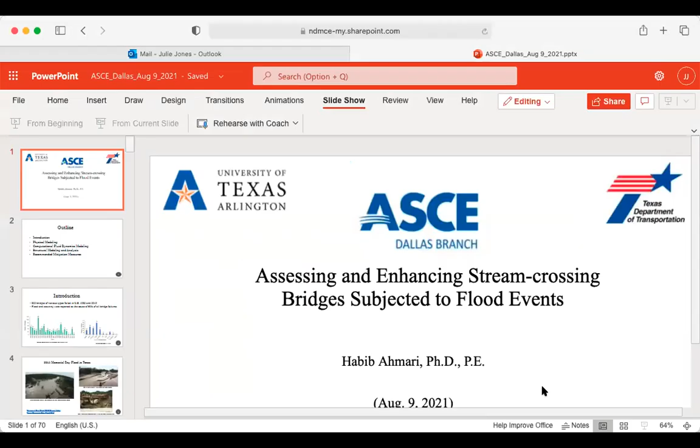It's not moving. Apparently it's... there we go. No, it should work. Okay, thanks so much.

So today I'm going to talk about some background information about this project. I'm going to talk about the physical modeling that we have performed, the numerical modeling as well as structural analysis, and finally the recommended mitigation measures that we have come up with for making bridges safer against flow hydrodynamics.

As you can see in this picture, between 1989 and 2012, more than 800 bridges failed in the US for different reasons. But if you look at the stats on the right side of the picture, you can see the major cause of collapse in bridges is attributed to either flooding or scouring, which is all a hydrodynamic issue. So more than 60% of bridge failures that happened in the US happened just because of flooding.

This is one example we had back in 2015 in the US during the Memorial Day flood event. There was about 12 inches of rain that poured down very quickly. The river water level rose about 35 feet, and several bridges failed in Texas, Wimberley and Fisher Road. You can see how the collapse happened and how this situation caused significant damage to the economy and accessibility to the region.

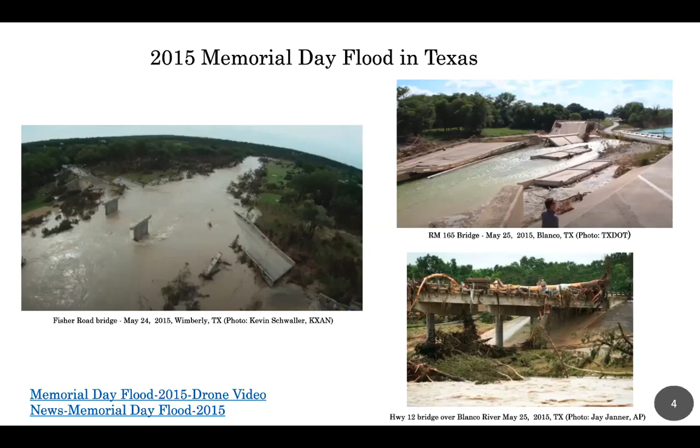If you focus on Texas only, TxDOT or Texas in general has the largest inventory of bridges, more than 54,000 bridges. In the US, we have about 10% of that basically in Texas.

In Texas, the way we design bridges is for 100-year floods, considering about 4 inches of freeboard. But we have seen many bridges that, even during the 25-year or 50-year flood, are inundated, either collapsed or partially damaged.

The TxDOT design policy requires designing bridges for a 100-year flood, while also considering mitigations for hydrodynamic forces, including shear keys or ear walls. An example of shear keys can be seen on the right side of the picture in the bottom slide.

These are the measures currently in place, but as I mentioned, we have seen many bridges collapsing even under lower flood conditions, like 25 or 50 years. The reason has been either significant velocity in the stream or significant debris brought by the flow.

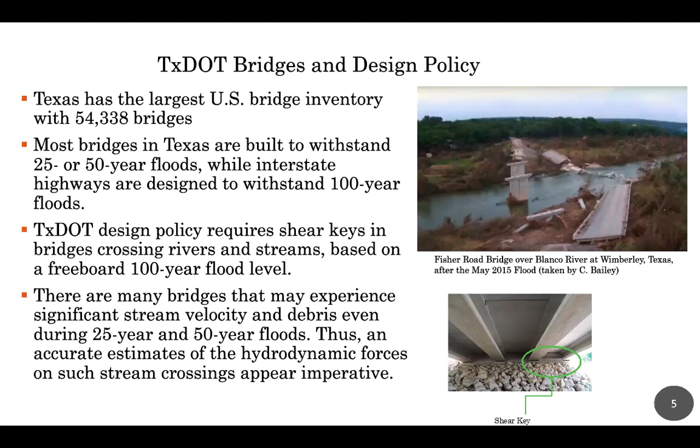Our approach in this study was conducting scale modeling in the lab of 4 different bridges in Texas, looking at TX girders, box beams, and slab beams. We also did computational fluid dynamics for scenarios we could not handle in the lab due to limitations of physical modeling. Eventually, we developed finite element structural models of the bridges and compared the forces to the resistance or shear forces in place based on current practice. Where those forces were larger than existing resistance, we came up with recommended mitigation measures for those cases.

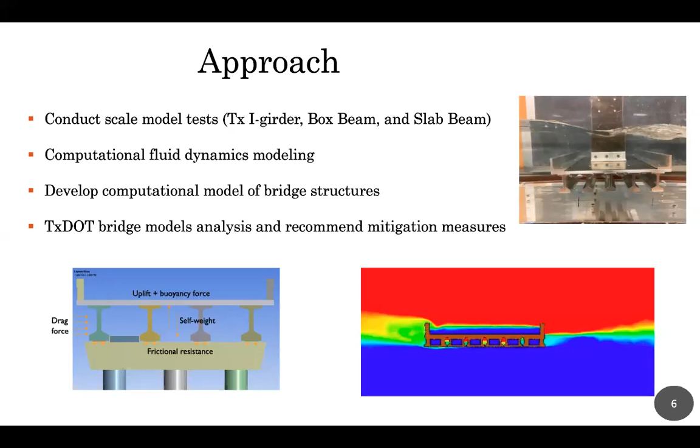In terms of physical modeling, we had 4 different tasks: starting with designing a scale model, then measuring flow and forces during different scenarios using several instruments. We conducted scale model tests on 4 different bridge models, and eventually developed force and moment coefficient design charts.

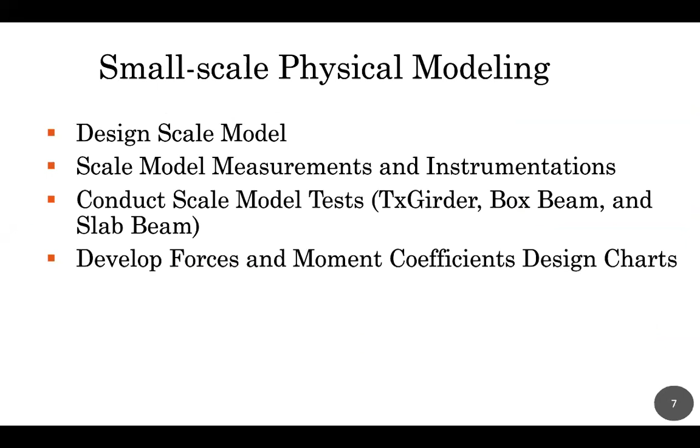This is our experimental setup. The flume was 17 feet long, 1 foot wide, and 1.5 feet tall. We built our scale model out of aluminum, which has almost the same density as reinforced concrete.

We scaled the bridges down 50 times smaller. We built girders, decks, as well as railings, and substructures, which I'll show you later on.

We measured flow velocity, discharge, depth, and so on, plus forces and overturning moments with instruments attached to the bridge. Here you see the bridge, the load cell, and the torque cell. We connected them and measured everything during different flow scenarios.

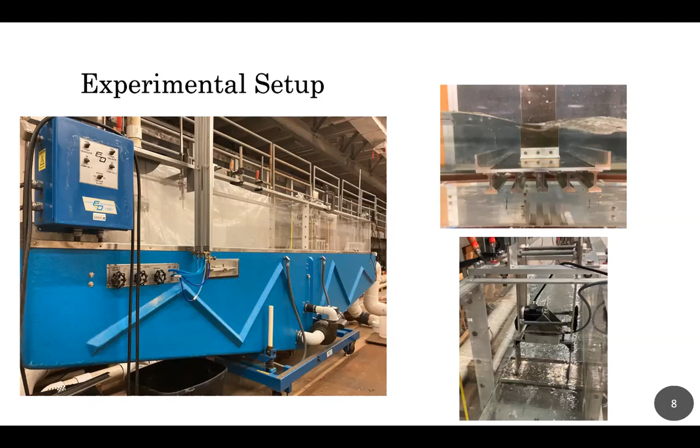These are the bridges that we modeled. We looked at 2 different bridges in terms of road base: 24 feet and 44 feet road base, and 4 different beams or girders.

Bridge number 1 is TX28. The second one is TX54. Then we have a box beam, 5B28, and a slab. So these are the superstructure scenarios that we looked at.

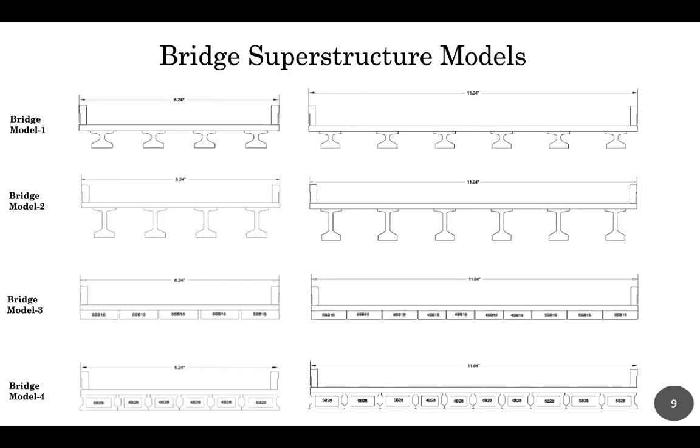We also included the more common type of railing in the model.

This is an example of how we scaled down the bridge size, using TX28. The deck thickness is around 9 inches in reality, and in the lab we scaled it down to 0.19 inch. The girder height for TX28 is 28 inches tall, so we scaled it down to almost half an inch. These are the scaled-down dimensions versus the actual dimensions.

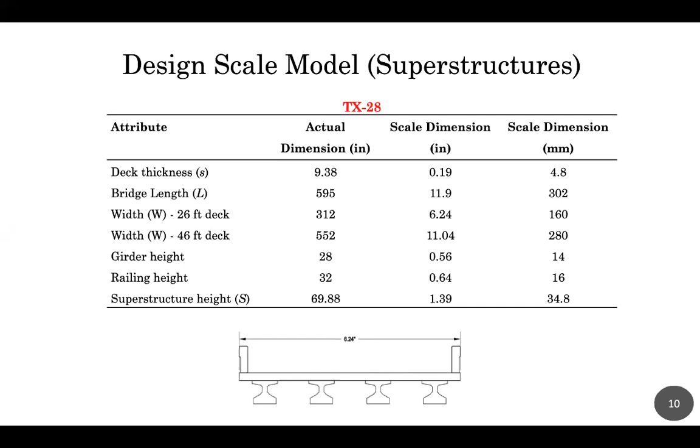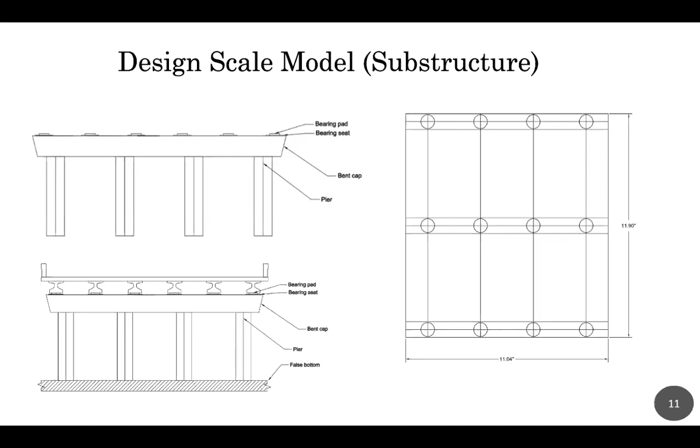This is one scenario we looked at, simulated using a flat plate debris. There are other cases where debris just accumulates in the flow direction across the channel, forming a wedge type of debris. We simulated both of these using wood material in the lab.

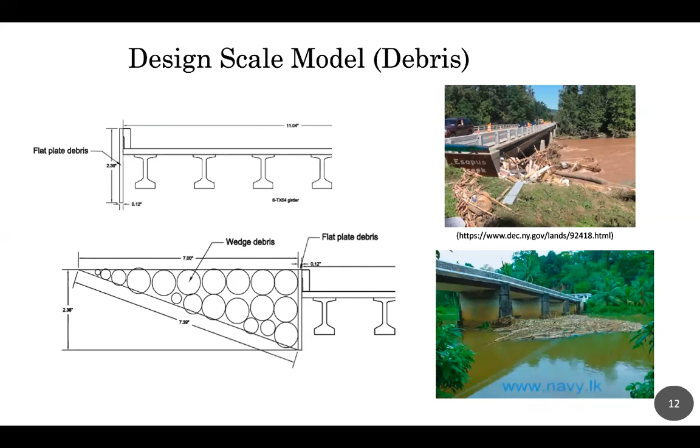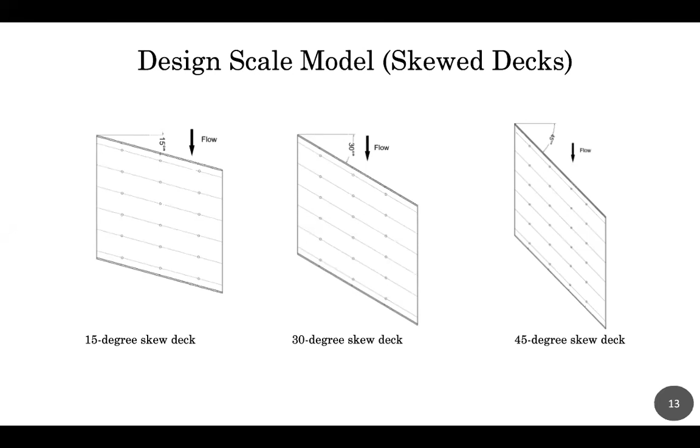Also, we look at the effect of the skew of the deck on the hydrodynamic forces. Not all bridges are straight, so the flow is not always perpendicular to the bridge. We look at how the skewness would affect the forces and the stability of the bridge. Besides the 0 degree skewness, we look at 15, 30, and 45 degree skewed cases, based on what we have seen in the field.

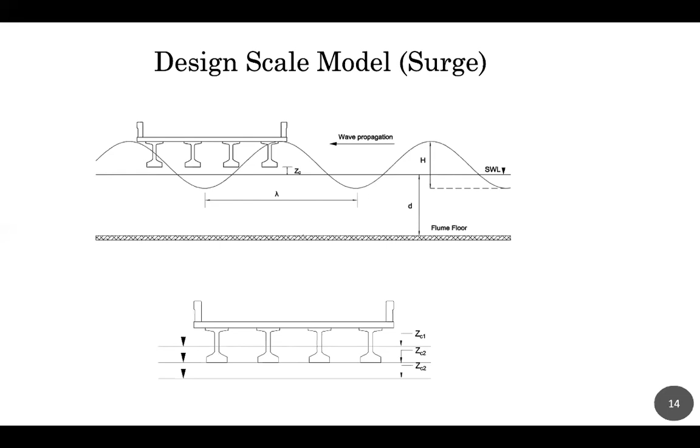The other thing we have seen in coastal areas is surge. Surge and wave are major components of the flow that can cause bridge collapse. So we look at surge with different surge height, length, as well as different initial still water conditions and flow depth.

For the flooding test conditions, we collected more than 300 bridge data points across Texas, either in inland areas or coastal zones, to come up with the flow range we need to look at. That range includes the depth of flow, the velocity, and how close the bridge deck is to the stream bed. We incorporate all these numbers together to come up with dimensionless numbers.

The first one is the inundation ratio, which measures how much the bridge is inundated. If the flow is just below the girder, the bridge is not inundated. If the flow is at the top of the railing, the inundation ratio is 1. As it goes up and up, the bridge gets more and more flooded. We look at inundation ratios basically from 0.25 up to 3, to incorporate the depth of flow.

The proximity ratio explains how close the bridge is to the bottom of the stream. If the bridge is too close to the bottom, there's a large increase in velocity and a lot of scouring might happen, which changes the flow regime entirely. We look at cases where the proximity ratio was around 1 to 5, covering very deep channels or very shallow channels.

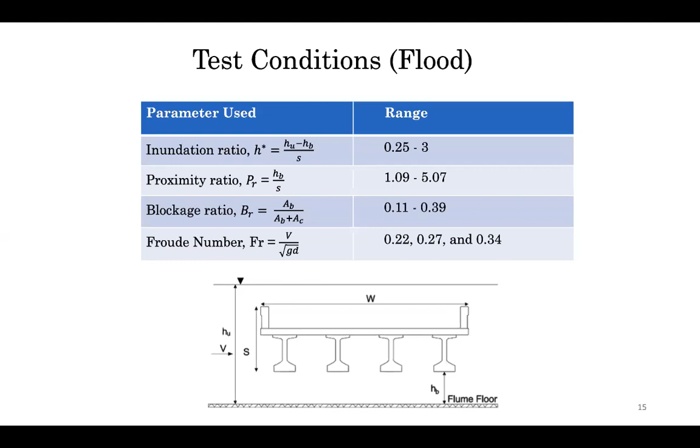And then we have a blockage ratio, for cases where you have a substructure and debris. This measures how much of the entire flow is blocked by debris or by the substructure, which would cause changes in hydrodynamic forces.

This is basically the test condition for surge, as I mentioned, one of the components. We look at different water depths. The model is 8.5 inches, but in reality it's 425 inches, about 35 feet, with flow depth up to 40 feet in the prototype. We look at the wave period, the wave height, and also the clearance height, with different water depth before the surge starts.

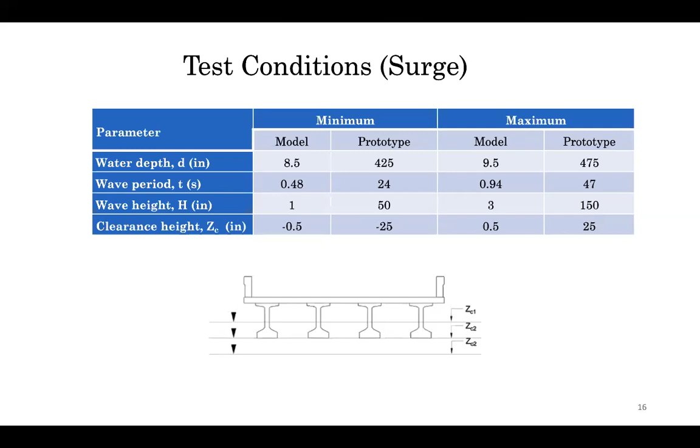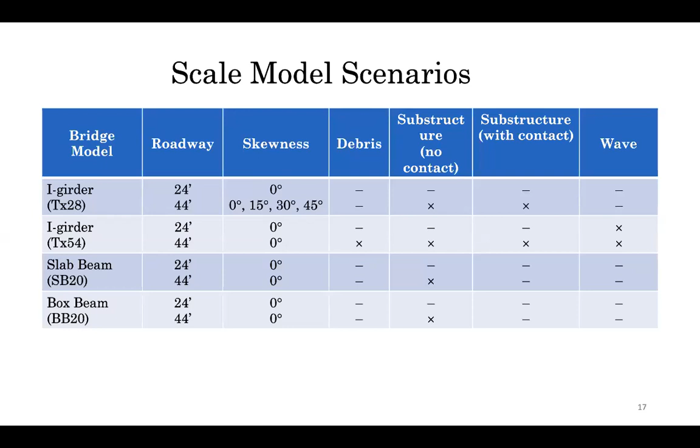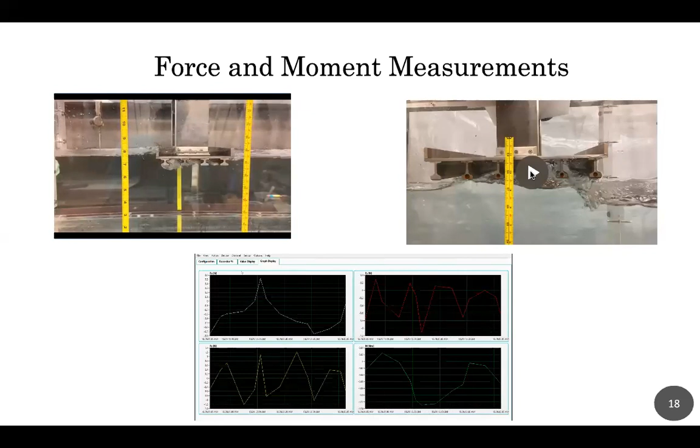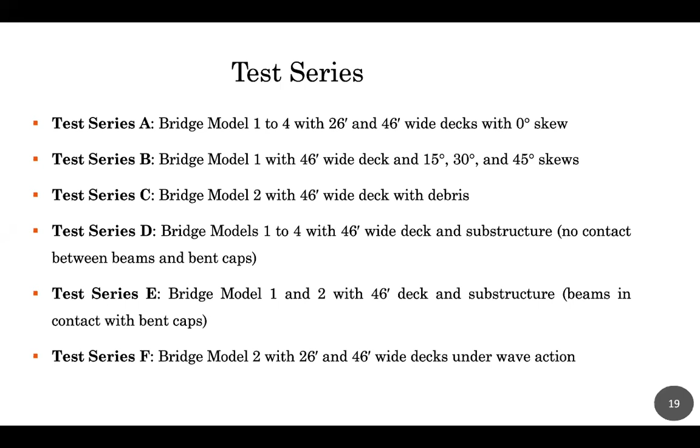So these are the test series A to F with different combinations of bridge geometry and different flow conditions, skewness. If you have a bridge with substructure and superstructure, we put the deck on top of the substructure without any contact to measure the forces. Then we put the deck on top of the substructure and remove the gauges to see if the bridge will collapse under hydrodynamic forces. Eventually we look at bridges under wave action. These are different scenarios we examined, a combination of flow conditions, geometry, as well as flow versus wave.

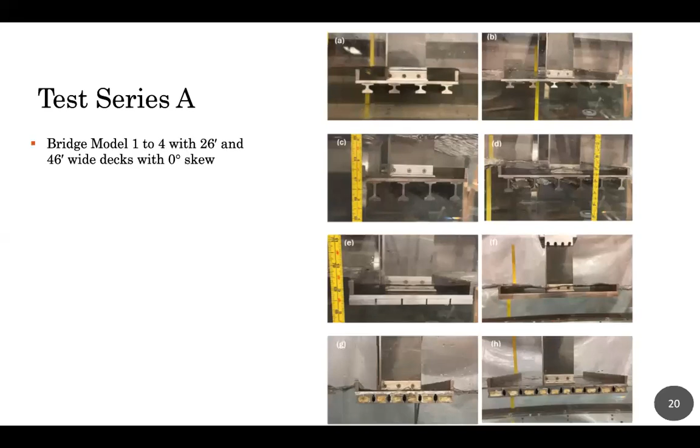So this is an example of test A. You can see on the left side a 24 foot roadway, and on the right side a 44 foot roadway, under different geometries: TX28, TX54, box beam, and slab beam.

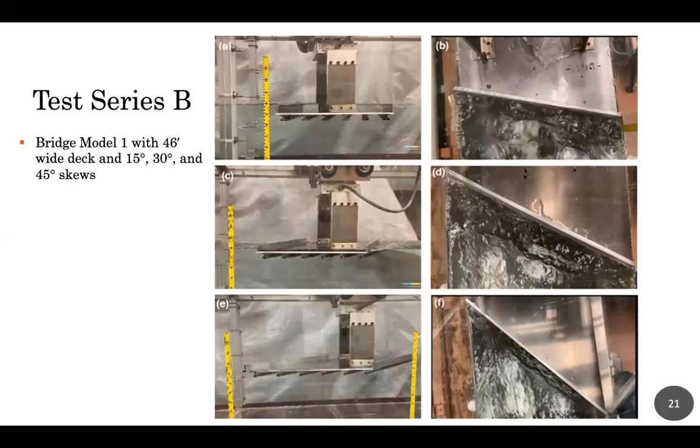I'll just quickly go over this slide. Here we have a straight deck versus a skewed deck from the top: 15 degree, 30 degree, and 45 degree skewed deck.

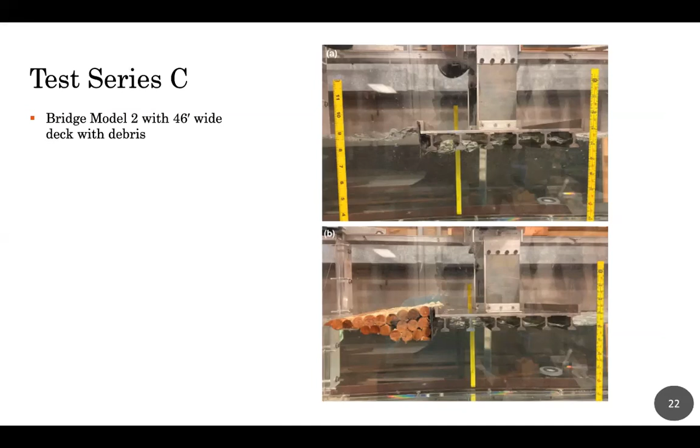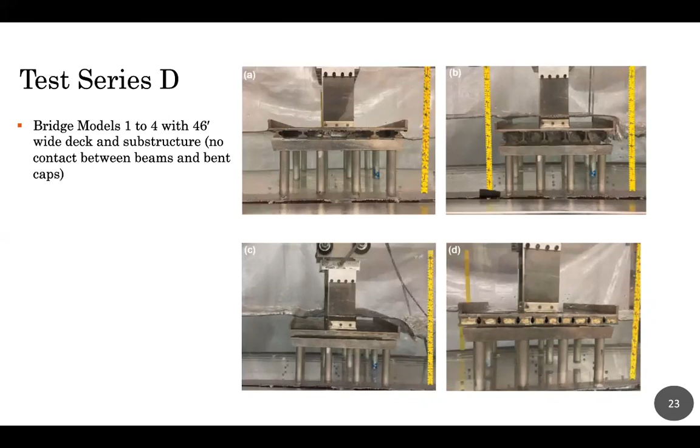This is the scenario where we look at the substructure and superstructure together, but we connected the system to gauges so we can measure the forces. There was no connection between the substructure and superstructure, making sure the bridge can move without any friction.

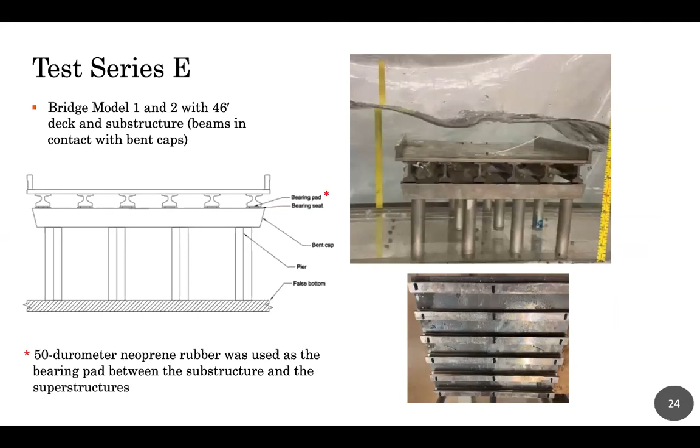Here we look at the wave. As you can see, different types of waves in terms of height, flow depth, duration, and wave length were simulated here.

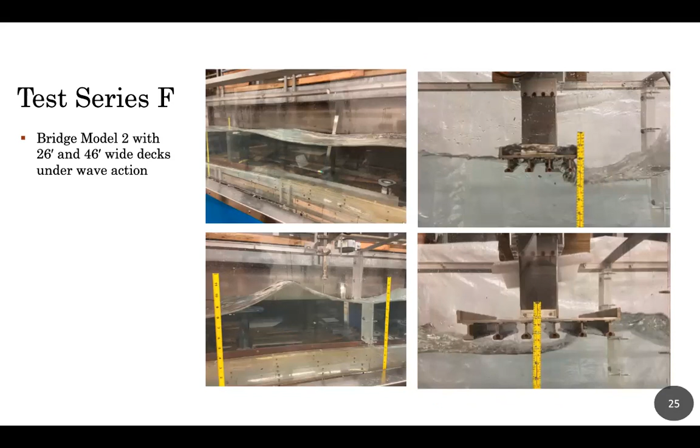So once we have all the measurements in terms of the forces, we look at the primary forces applied on a bridge. This is just the superstructure. Forces include hydrostatic force on both sides of the bridge, buoyancy pushing the bridge up, and the drag force.

These two are the dynamic forces; the first are the static forces. The drag force pushes the bridge in the flow direction, and we have lift force, either pushing it up or pulling it down, depending on the flow condition. We also have overturning moments.

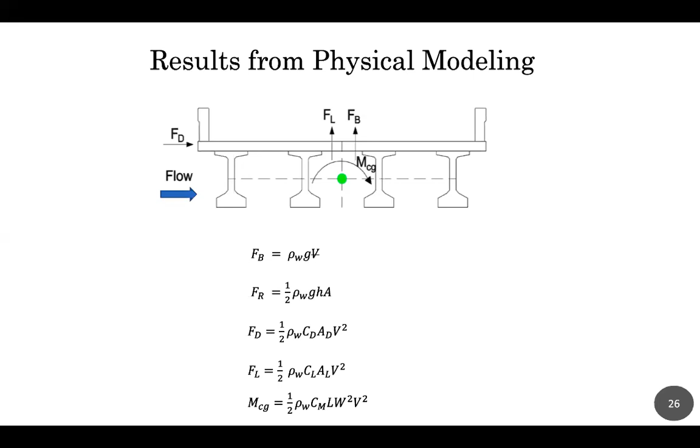So we have the forces and moments measured by the instruments, but the question is what are these numbers, the coefficients we have: CD, CL, CM. This is basically how the shape of the bridge will impact the amount of force. This is not something we can just come up with; you have to have the exact shape and test it, and depending on the shape of the bluff body, these values may change. There are other factors affecting how CD, CL, and CM will change. I'm going to discuss how we come up with these values.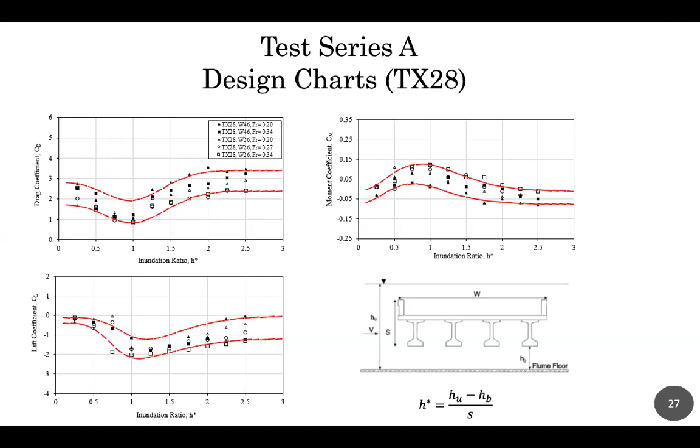Same thing, you can see the moment coefficient has a small variation with the inundation ratio, but again peaks at an inundation ratio of 1. So we ran many scenarios. I don't want to show all of them here, but this is just a summary of all bridges without substructure, just superstructures, but different geometry.

So this is the trend we have seen for many cases across different geometries under different flow conditions. You can see there is a higher bound and lower bound of the lift, drag, or moment coefficient that can be used for the design of a bridge, depending on what type of flow condition or bridge type we are dealing with.

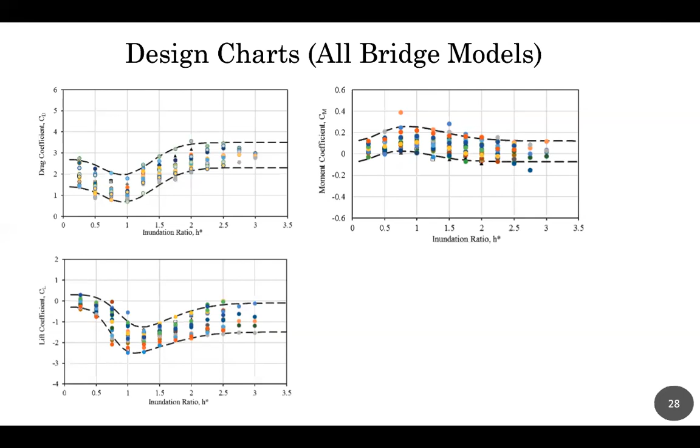So based on the figures and relationships we prepared, these are the design equations for CD, CL, and CM. Either we can use a general equation for any type of bridge under any flow conditions, or we can just use equations developed based on a specific bridge geometry.

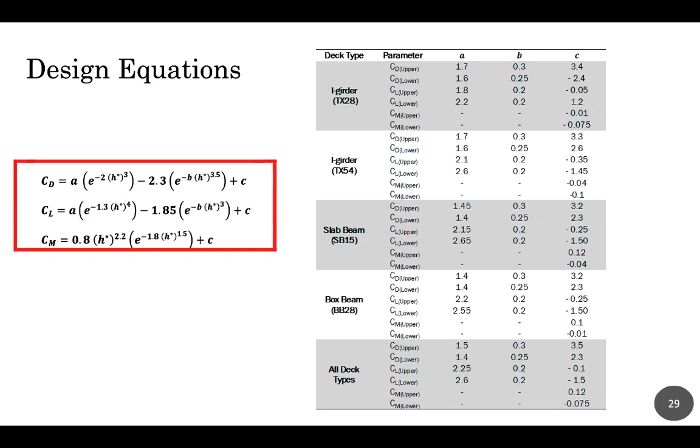So we developed this equation, and then we looked at the effect of skewness, from 15, 30, 45 degree skew, as well as zero skew. The zero skew is basically the blue and green color dots. If you change the skew, obviously the lift, drag, and moment coefficients will change. But this information can be used when you're designing a skewed deck.

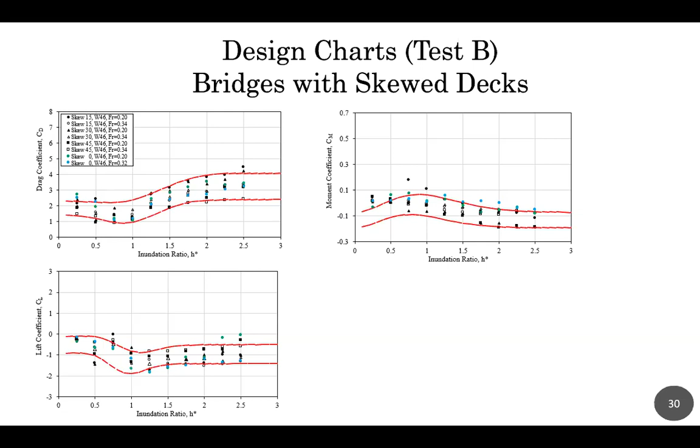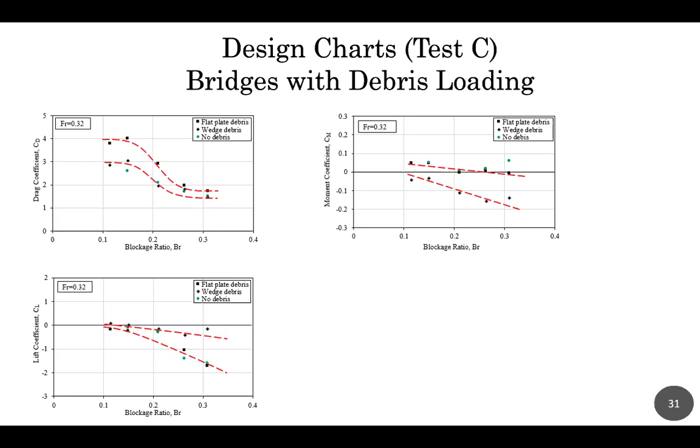This is also looking at the bridge debris, how blockage ratio would impact the change in drag coefficient, lift coefficient, and moment coefficient. So we have flat plate, the slab, which would create higher values of CD and CM, and then wedge debris which streamlines the flow and doesn't cause that much drag compared to the slab debris. So we developed these charts also in case you are designing a bridge with debris.

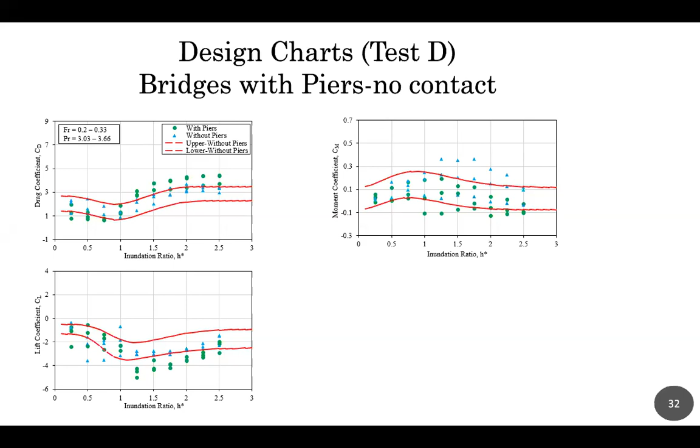This is looking at basically the effect of the superstructure and substructure together. So these are the upper and lower boundary when we did not have any piers, but when you add the piers, obviously the blockage increases and would change the forces acting on the bridge itself. So if you're designing a bridge that has abutments and piers, definitely the drag force would be much different from just a bridge across the road without any middle piers.

So for this case, we tried to see if the bridge would collapse under this flow condition. In the lab, it did not happen. We could not go as high as possible in terms of the flow depth, velocity, and the forces introduced to the bridge, so we didn't see any failure.

But again, the limitation was the Froude number. First of all, we could not go beyond 0.34 in the lab. So we decided to look at higher Froude numbers using computational fluid dynamics.

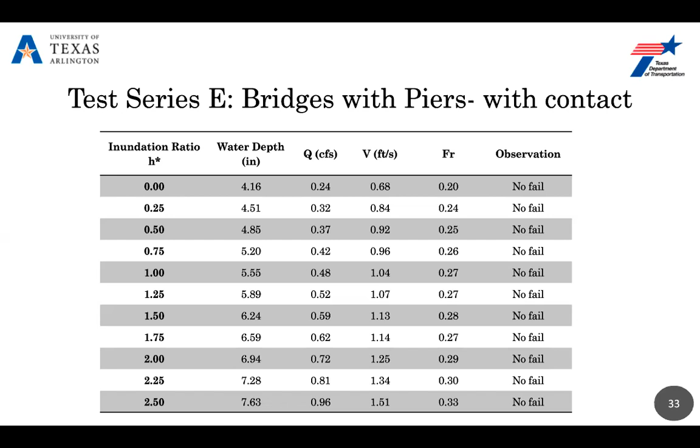So another thing we looked at is basically the impact of bridge geometry on the flow condition. So we use the technology called PIV.

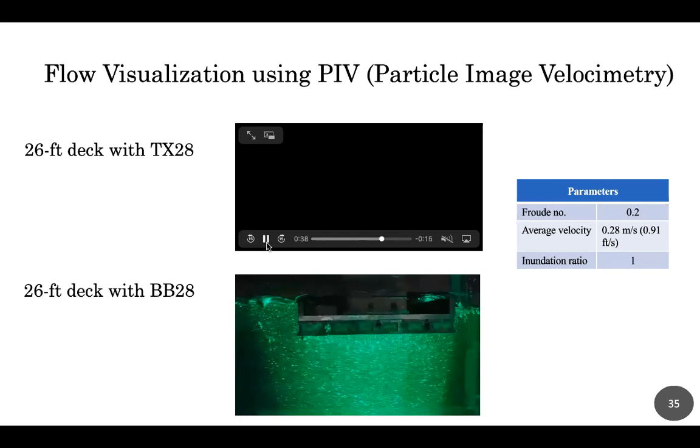It basically shows how flow condition would be different under different bridge geometry. So this is the box beam. The other one was basically the slab beam, girder, I-girder. And then we look at this corner.

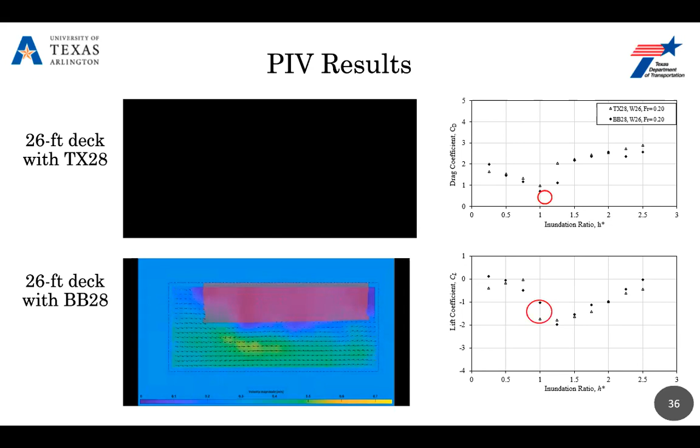So we can see how flow condition under the bridge would be different, I-girder versus the box beam. The girders are sticking out, causing more break in the flow and disturbing the flow, and that disturbance will cause different force acting on the bridge as well as different coefficients for these forces.

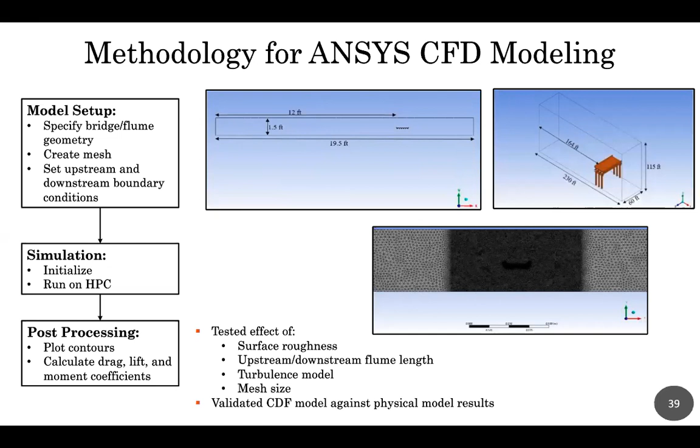So in terms of computational fluid dynamics, we used ANSYS to look at bridge scenarios we could not simulate in the lab. We simulated the exact type of flow we had in the lab, 12 feet, same width, same depth. We provided a smaller mesh around the bridge and a larger mesh outside the zone of influence of the bridge. To use the CFD modeling, we had to calibrate and verify the model with experimental work, so the first step was to look at the validation model.

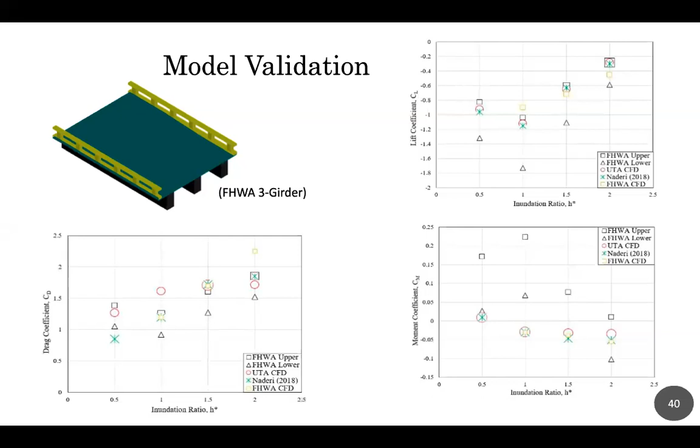In literature, there's a study by FHWA and other research teams looking at this three-girder bridge. So we simulated this bridge to make sure our model is working properly. The results for drag, lift, and moment coefficients are in line with what has been done previously by other researchers.

We also validated our model with our experimental results. The validation worked to some degree, especially for the lift force, which was comparable. For drag force, it was comparable at an inundation ratio of 1.5, but after that, the CFD modeling results were smaller compared to what we see in the lab.

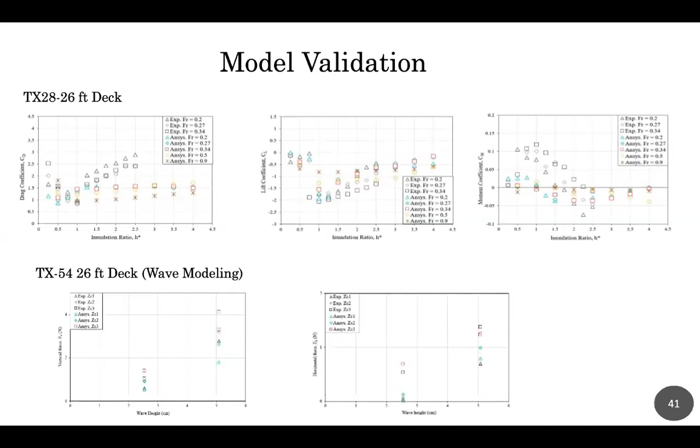Obviously, whatever is happening in the lab, we trust. I'm an experimentalist myself, so I trust the lab experiments more. This discrepancy has been seen in other places too—there are always differences. But based on this practice, we looked at different scenarios after finding that we can trust the model to some degree.

We extended the Froude number values up to 0.9, making sure we cover everything in the field. We also extended the inundation ratio up to 4 in some cases—we could not go beyond 2.5 in the lab. So we covered everything and ran the model for all the scenarios we had in the lab.

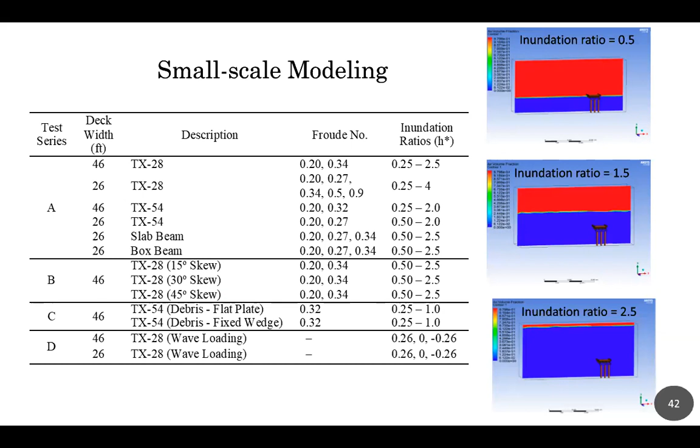So these are some of the results. We developed similar types of charts in the lab, based on the numerical work.

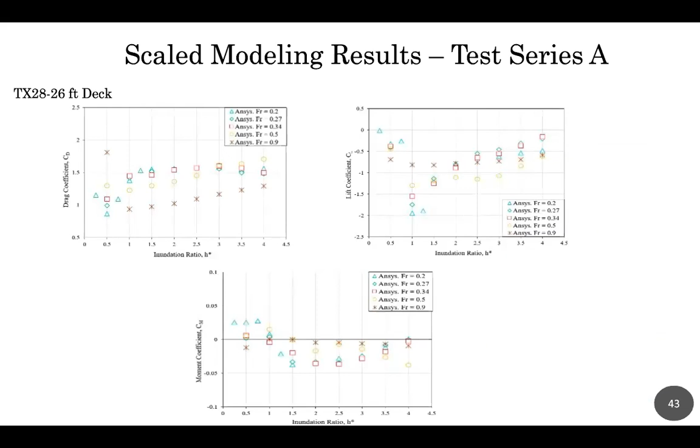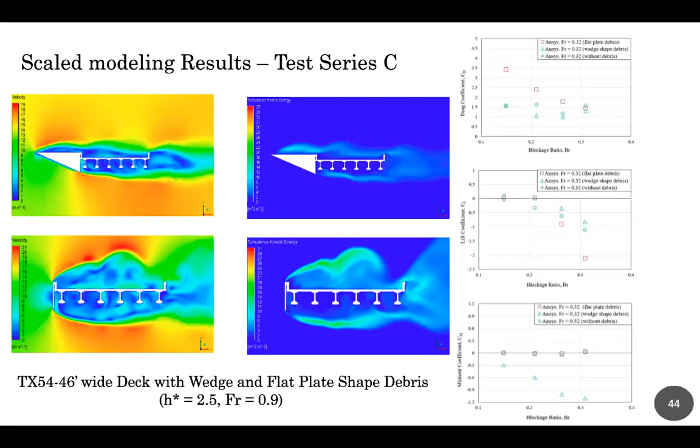These are some snapshots of the flow regime around bridges with debris—flat plate debris and wedge debris—showing how they impact the flow condition and flow regime.

Once we completed this small-scale CFD modeling, computational fluid dynamics, we simulated full-scale bridges because now we need the forces—forces to compare with the resistance forces provided by the bridges. So we basically repeated our experiments, but now at full scale with ANSYS CFD modeling.

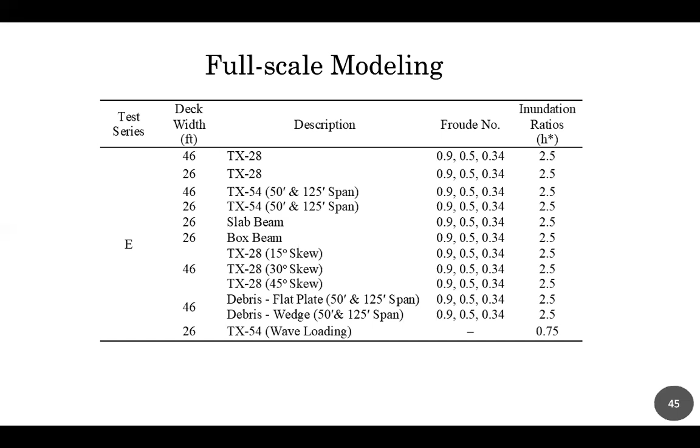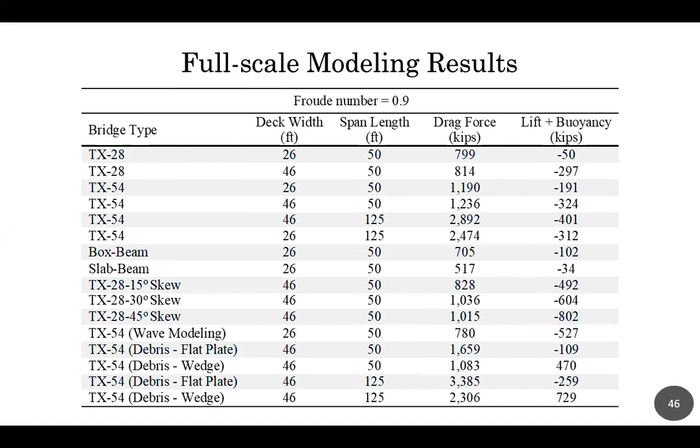Now we have the forces. The next step is doing the structural analysis. The same bridge model was used to do the structural analysis, looking at the properties of the material, and coming up with the resistance forces provided by the concrete itself and by the rebars, to see if the shear key, for example, would be enough to resist the flood force or not.

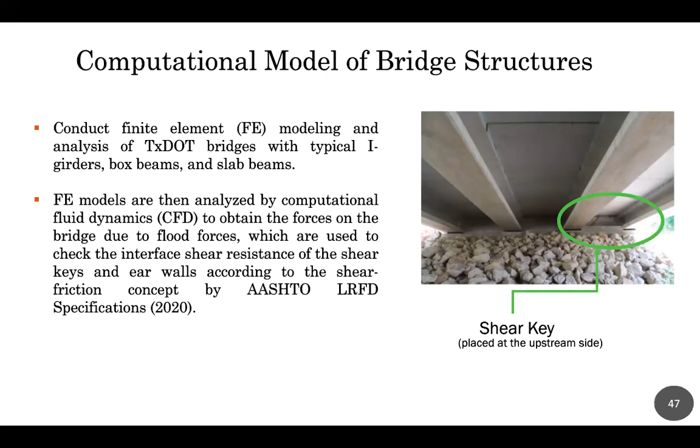TxDOT uses shear keys—basically a block of concrete between the girders, held down by rebars, to make sure that if there is a lateral force, the deck doesn't move. For box beam and slab beam bridges, they use ear walls instead—placed at the end of the bent cap, same concept, a block of concrete held down by rebars, making sure the lateral force doesn't cause bridge collapse.

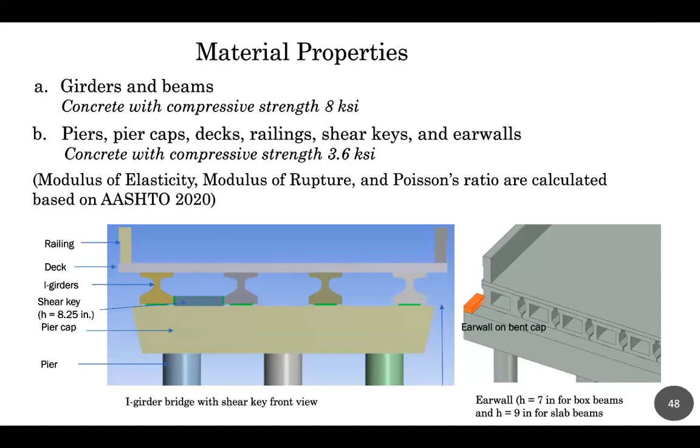So based on the girders, beams, piers, and all the elements and their properties, we calculated the resistant forces, and even the friction between the bridge and the substructure.

So these are the models we looked at—the I-girders again, the box beam, the slab beam. You can see the shear key; it's the standard practice by TxDOT, having one shear key, and they have the ear walls for these slab beam and box beam bridges.

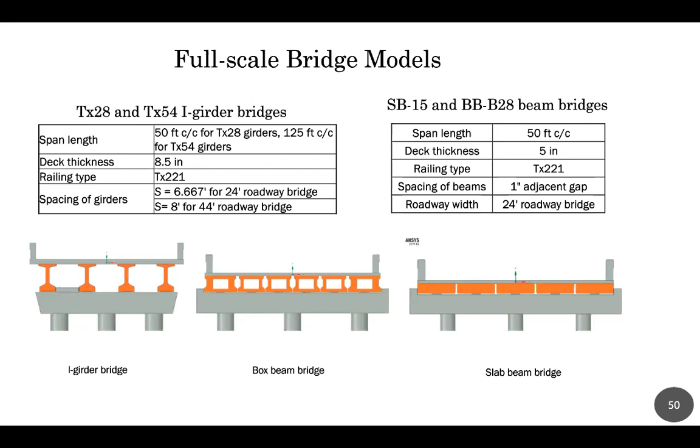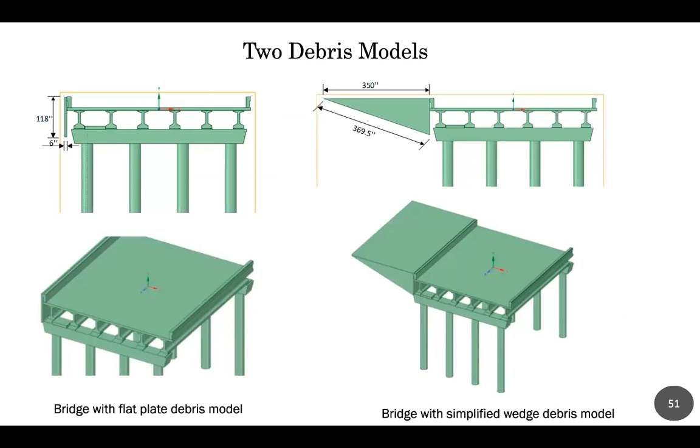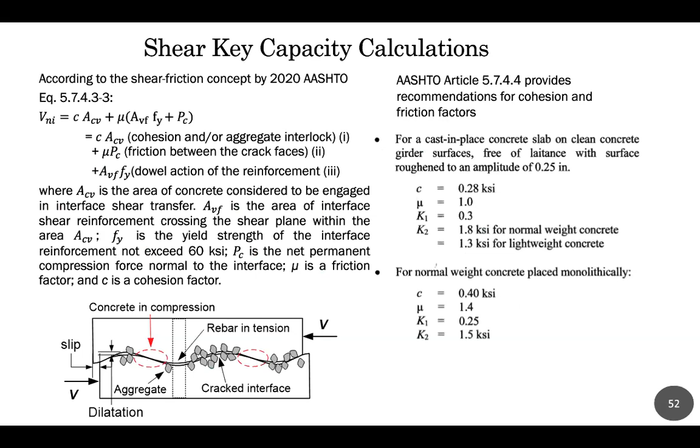We also looked at the effect of debris as well as waves, as we did in other experiments. I don't want to go through all these details, but this is basically how the capacity of the shear key is calculated, based on the friction between the materials as well as the resistance provided by the rebars.

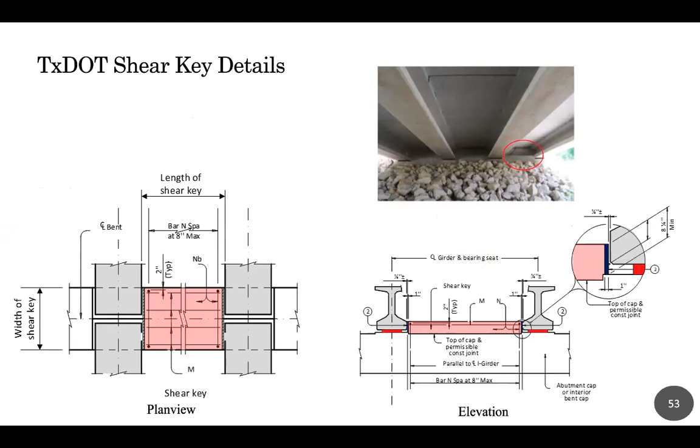So these are the details, basically the TxDOT specifications for the shear key—the thickness of the shear key, the number of bars, and the size of the bars. And this is the ear wall, the typical ear wall TxDOT details.

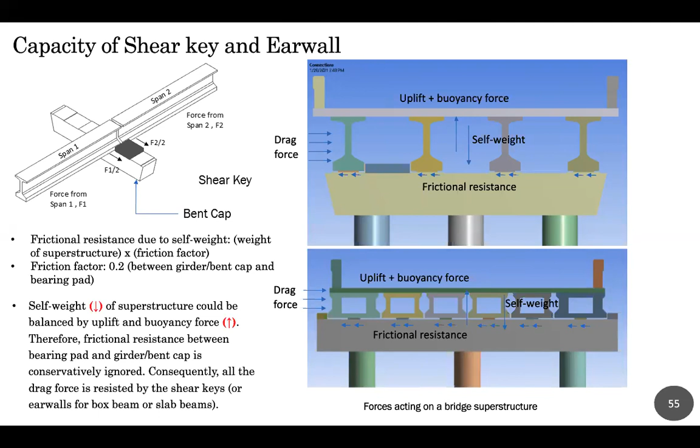So these are the forces I mentioned. We have the drag force pushing the deck, you have the friction between the substructure and superstructure resisting the movement, and the shear key also resisting the movement. You have the uplift force, the drag, the buoyancy, and the hydrostatic forces. All these forces are combined, but to be on the conservative side, we decided not to account for the frictional resistance. We just relied on the shear key and earwalls to hold the bridge in place during the flood.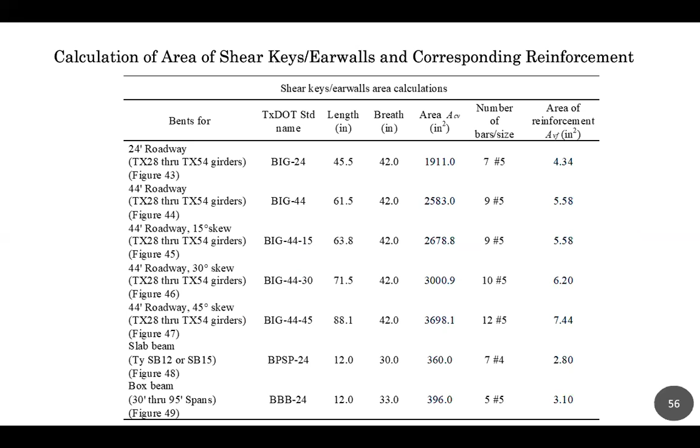So here is the detail of how we calculated how much reinforcement we have and how much resistance we have for different regions. Then we want to compare the resistance versus the applied forces. That was the idea.

So this is the summary of the resistance forces by shear key. For example, the first line: if you have 24 roadway TX28, what would be the total force that can be resisted by the shear key? 716.

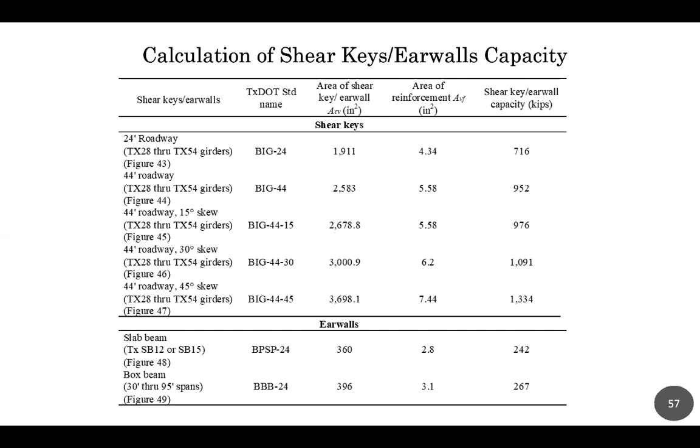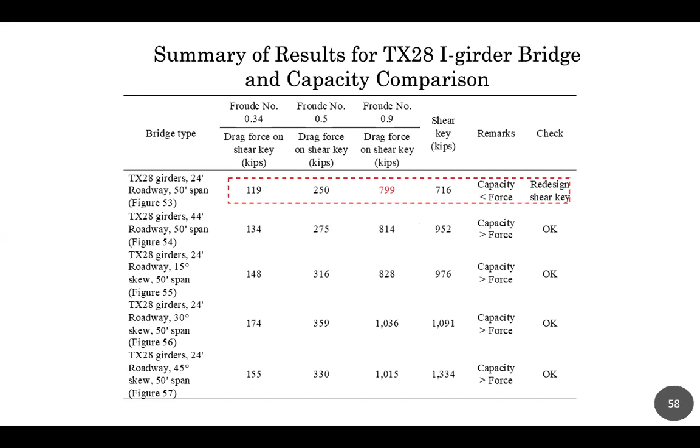Now, we have 716, but the force we got from the modeling is 799 for case 1. Meaning that under the flow condition, if the Froude number is 0.9, severe flood condition, the bridge cannot hold down. They just collapse in that condition. So we need to do something for that case. With the other cases, the bridge seems to work very well with the current practice of TxDOT.

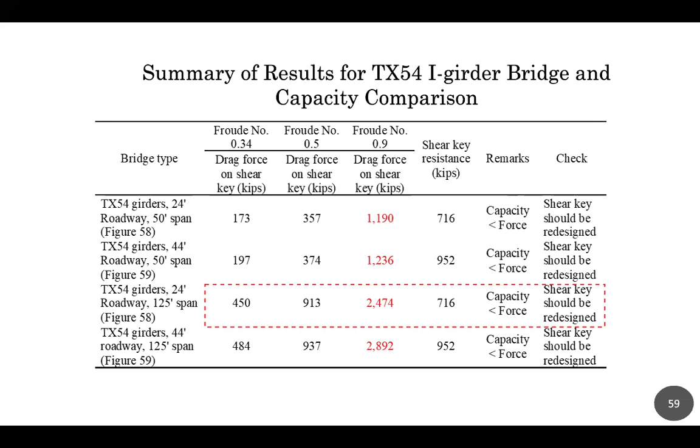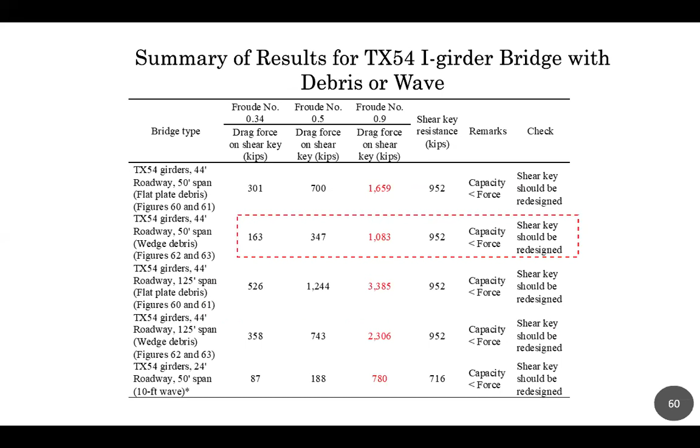TX54, the red areas show where the drag force is larger than the shear key or earwall capacity, so we have to do something about these cases. Same thing here, when you have debris or wave, there are many cases where we have to do some mitigation to make sure that the bridge is not moving.

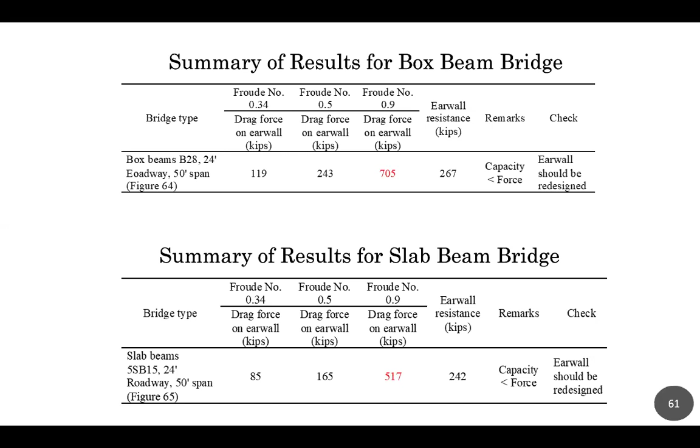Same as box beam and slab beam, there is a need for some mitigation when the Froude number is 0.9, a very severe flood condition.

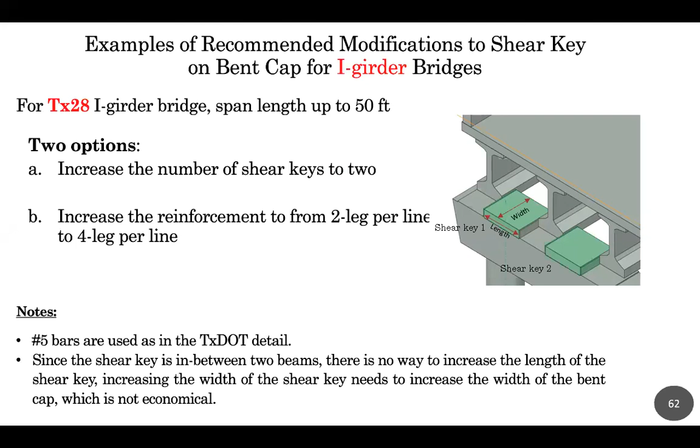So the solutions or recommendations, these are the recommendations we just gave TxDOT a few days ago. Instead of using one shear key, we can use 2 shear keys. This is one of them, for TX28. The other one is just increasing the reinforcement from 2 legs per line to 4 legs per line, as shown here.

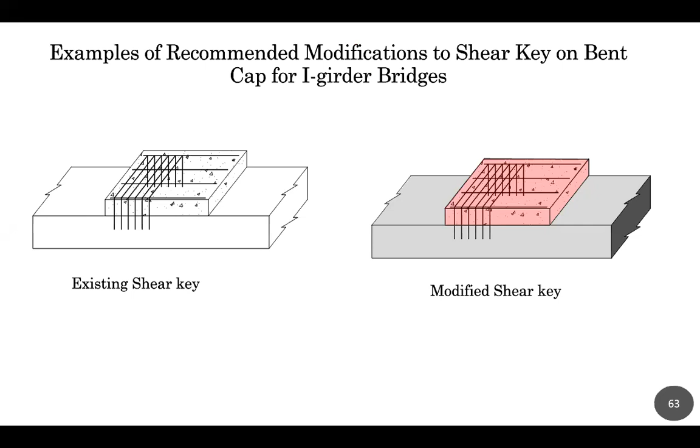For TX54, even 2 shear keys may not work, so we recommended adding 3 shear keys. Basically using the existing design but adding more shear keys, which is a simple solution. Or the other option is increasing the 2 legs per line to 4 legs per line.

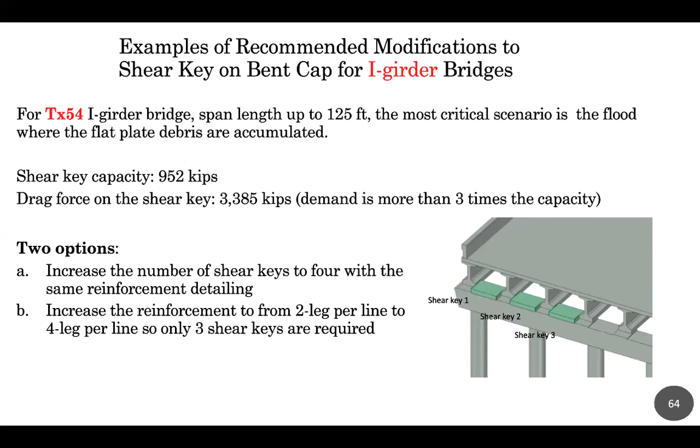For a slab beam, the situation is a little different because you have earwalls on the 2 ends and don't have much room to add more earwalls. So the idea is to extend the bent cap and increase the size of the earwall, by an additional 24 inches. This is the existing detail, and this is the recommended one. The gray area shows the earwalls extended by 24 inches.

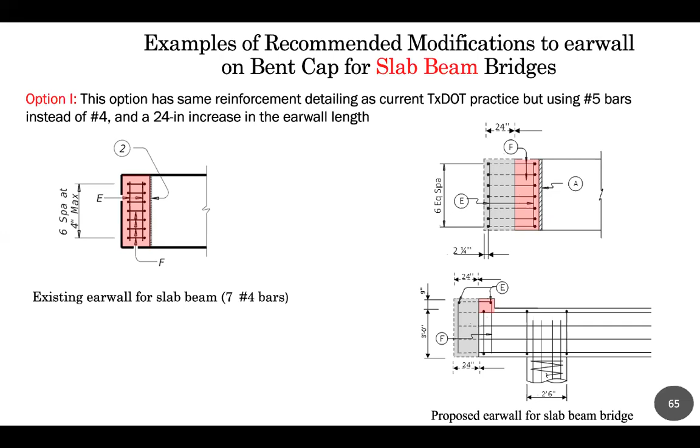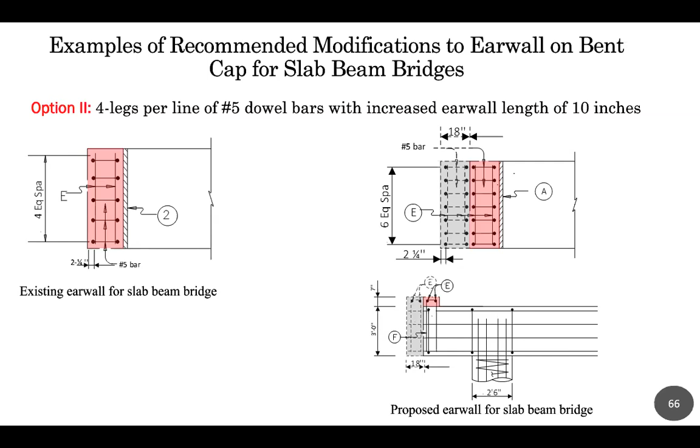Option 2 would be going with an additional 18 inches in length, but changing the amount of rebar. For box beam, same thing: extending by 18 inches to make sure that you have enough resistance.

And the conclusion: we looked at 1:50 scale models in the lab, different bridge geometries, different flow scenarios, and came up with design charts for different conditions. We tested all these in CFD modeling to cover the entire range of flow observed in the field, especially the Froude number, which has a significant effect on the force. Once we had the bridge model built at full scale, we measured and calculated the forces and compared them with the resistance forces.

In some scenarios, we saw that the applied force is more than the capacity, and for those cases we recommended some modifications, and it's up to TxDOT to adopt them or not. We'll be talking with them in the next few months. Thanks so much.